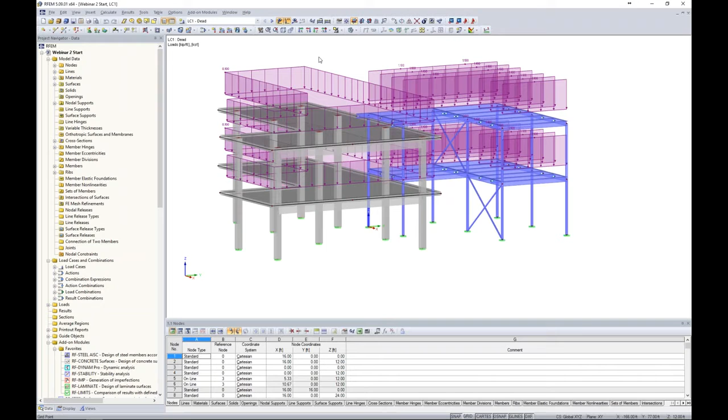Previously we loaded the structure, and we ran our load combinations and got a full analysis. Now that isn't always the case. Sometimes we go to run an analysis after we have loaded our structure. For example, we have loaded our structure with dead load here. Previously everything ran great, but as we know with any finite element software, that doesn't always happen. So when we go to run this first load case, as we know from RFEM Webinar 1, this is running according to a linear analysis, and we immediately get an instability.

Instabilities are nothing new despite what program you're using, but I want to show you these features that make our lives a little bit easier within RFEM. The first thing to know is the text about the specific instability. It says this model is unstable. The instability is found at FE node number 64, direction Z. So it immediately gives me a location and tells me that there's some type of issue in the global vertical direction.

The model is statically underdetermined. So when I close out of this error message, you'll see that my big red arrow shows me exactly where FE node number 64 occurs. Now, I'm not going to say that 100% of the time this big red arrow is going to point out our issue.

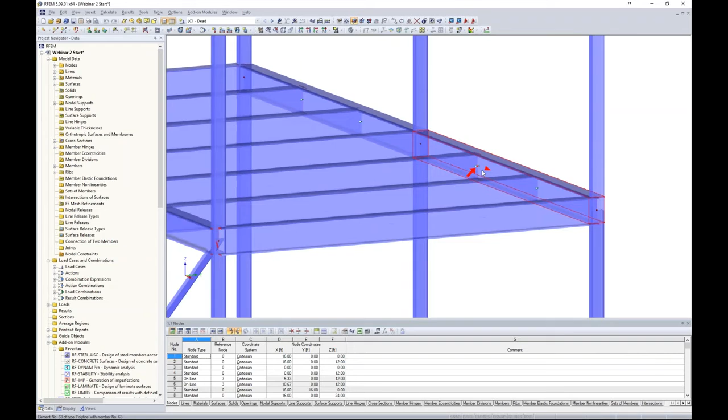But a lot of the time this really is where the issue is occurring. So when I scroll in here, I really don't see anything immediately. When I turn it to a wireframe model, I can zoom in here and see that I forgot to connect my node here of my beam to my transverse beam. Well, that's no problem at all, I can just easily drag and drop that to connect those two members.

So you can imagine that when we have a huge model with a lot of members and we get this error message for an instability, that red arrow is a huge benefit to really narrow down on where that issue is occurring, rather than it being a hunt for a needle in a haystack trying to determine if a node isn't connected someplace.

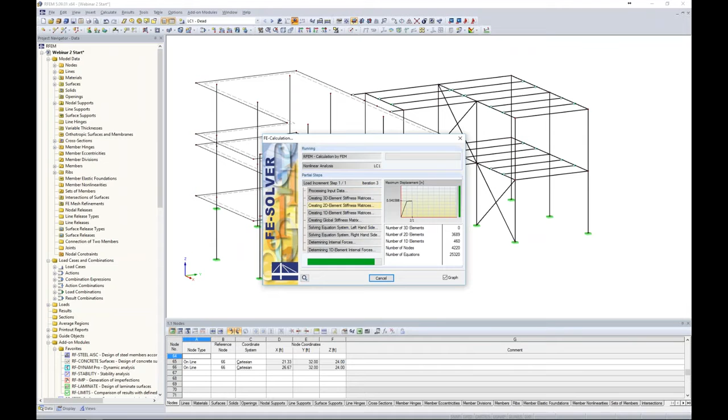So now we can go and run our load combination again, or this is our particular load case. We run it, everything appears to run okay this time. We immediately get our deflections here, which we can decrease the deformation factor.

So that's great, but now we need to run our first load combination, 1.4 dead load. This is just a load combination from ASCE 7. I take a look at my applied loads - it's applying that 1.4 factor to all of my dead loads, our surface loads and line loads here.

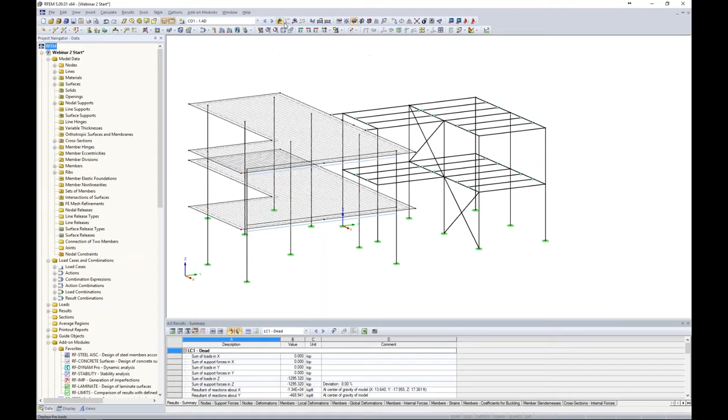And maybe turning this back into the rendered view, I begin my first load combination analysis. And lo and behold, we get another error message - another instability. But this time our text is a little bit different. It says our model is unstable and the instability is found at this location, direction X. So we have a little bit of a different direction that it's being affected now.

But this says a specified load is greater than the critical load. So this tells me that at this particular location I probably have some type of issue with buckling, because the specified load is greater than the critical load.

Well, I can close out of this error message and zoom into this big red arrow here. Maybe I turn this into wireframe - I see that everything is connecting fine. So I don't really understand where this error message could be coming from.

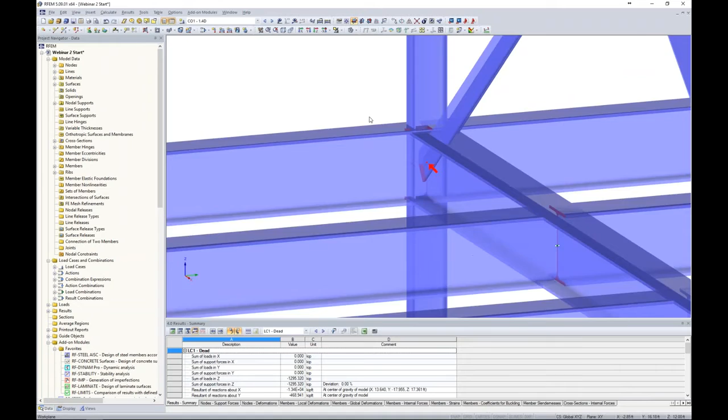Well, this is where we can utilize our add-on module RF-Stability. So from our long list of add-on modules over here on the left in our project navigator, we can launch RF-Stability. As you can see, this is just a simple dialog box that pops up within the program, and it allows us to do an eigenvalue analysis for a few different eigenvalues based on the buckling behavior of our structure. And what we can do is import different axial forces from either load cases or combinations.

Now, because I was able to solve for my first load case, dead load, just fine, it makes sense to import in those axial loads to see how the structure is behaving based on those applied axial forces. Now, we have quite a few other settings here that I won't get into in too much detail, but we do have an option down here to calculate an eigenvector for an unstable model. So this is if I couldn't get the model to solve at all, so that the causes of the instability can be checked graphically. This is a feature too, if we couldn't even get our dead load to solve.

Now for this, I will run the calculation, and it quickly runs the different 4 eigenvalues. I'll now see my results available in my tables here. So you'll see I'll have 2 different columns - the first is the critical load factor.

Now the critical load factor is just a factor that I can multiply that applied dead load by before I'm going to see the associated buckling behavior. We have 4 different eigenvalues, so the critical load factors are listed here in ascending order. So probably our most important one would be this first eigenvalue.

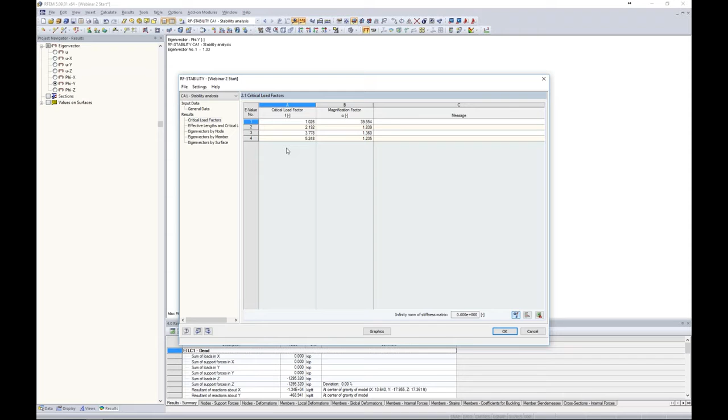So if I take a look at my graphics, we're still in this add-on module RF Stability. We can see with our drop-down box here, I have my 4 different eigenvectors. Looking at the first eigenvector, we can see the buckling behavior of this structure. Remember, I can only multiply my dead loads by 1.03 before I'm seeing this type of behavior. Taking a look at the other eigenvectors, same type of behavior. It all has to do with these slender columns here. So you can imagine when I multiply my dead load by 1.03, I see this buckling behavior, and when I'm trying to run 1.4 times my dead load, that's where our instability is coming from. These members simply can't handle the applied loads.

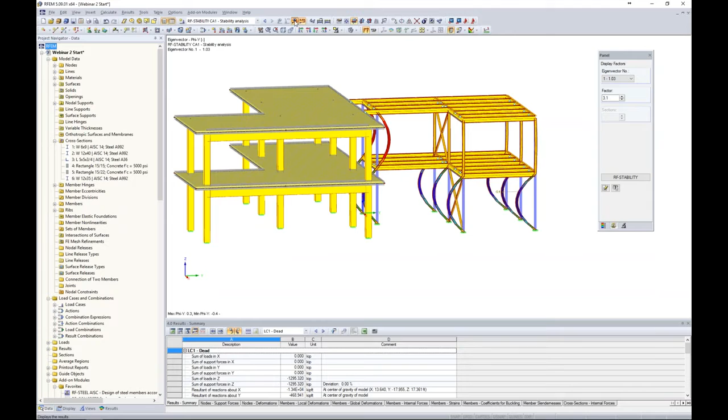Back under my data tab, at the very top is all of my input data. I can take a look at my cross sections, for example, maybe turn off my results here from RF Stability. I click on my first cross section defined. It's a W6x9, a very small number, so perhaps I want to increase that to something larger. I can just right click and edit all of these cross sections at once because they're assigned to a single cross section within the program. Open up my cross-section database, here are all of my AISC shapes. We would like to choose something more like a W10x49, much bigger than a 6x9. Still A992 is okay, but obviously we're going to have a bigger cross-section here. I click OK, and it's asking me to clear my results.

So now when we go to run our 1.4 dead load, run the analysis, everything should run fine because now we have a little bit more of a sturdier member there, and we don't see that same buckling behavior. You can see how RF Stability is extremely useful, not only if you just have an instability, but if you want to see the different buckling modes of your structure. I did a few other webinars where I utilized RF Stability to export as imperfections as well.

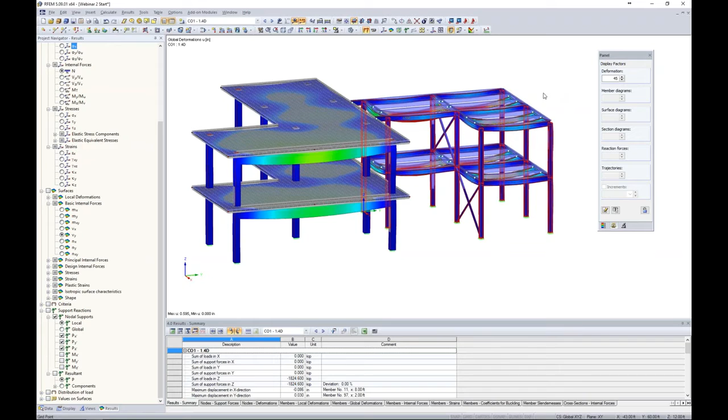Okay, so now that we have addressed instabilities, I'd like to move on to singularities. The first thing to do is to turn off our results, and let's take a look at our top surface here of our concrete structure.

If I drag my selection toolbar or selection box over that top surface, I can use my drop-down box here to create a visibility by selected objects. You can always right-click and show the hidden objects in the background if you'd like, or you can right-click and turn that off so we get a clean view of only the structure we've selected. Under Views, I can create a new visibility, and we'll call this Top Slab. I click OK, so now I have this user-defined view under Views that I can always refer to despite whatever view I'm currently in.

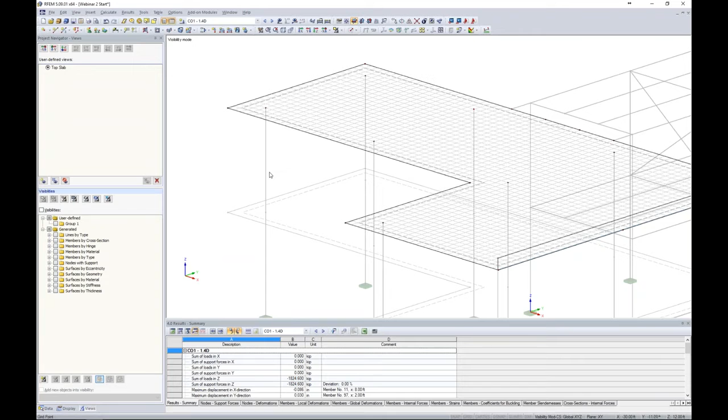This is the case when we go to show the hidden objects in the background and show a wireframe view: members are always 1D elements in a finite element software, while our surfaces are 2D elements. But the problem is that where we intersect this column to the 2D surface, the intersection occurs at this teeny tiny FE mesh element, the single node point. So we can imagine that all of our force transfer is occurring at this single point. Inevitably we're going to get very high stresses, very high forces. If we go to do design of this concrete slab, we're going to get high reinforcement simply because it's a product of the high internal forces at this location.

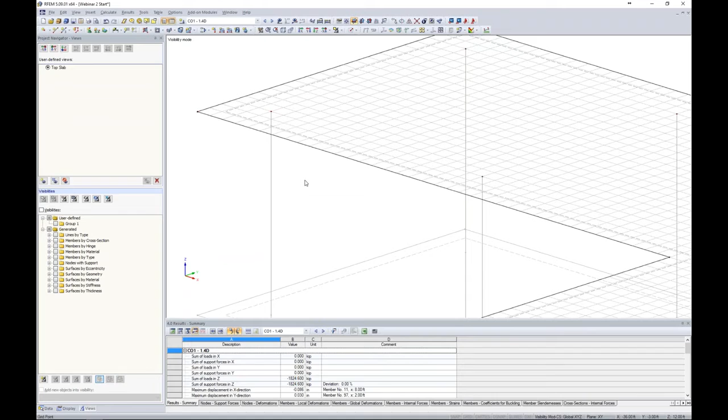Now in reality, when we render this, these columns are 15 inches by 15 inches, so we are going to get some load distribution. And like I said, this is not just for our program RFEM, this is common in any finite element software. So what tools do we have available in RFEM to help us address this so that we are not overly designing our structure?

Well, the first thing, and what I'm going to do, is jump to a different model here that I have saved, and I have went ahead and used our add-on module RF Concrete Surfaces to do my reinforcement design. Now I have an entire hour-long webinar dedicated to just surface design using this add-on module, so we won't get into it today. But again, if you are interested in how we can do reinforcement design for this, refer to that YouTube video.

So once we run our analysis in RF concrete surfaces to get design per the ACI, we have our different required reinforcement. The first is AS1 in the top direction. Judging by this red arrow, we can see the reinforcement direction, and you'll notice that where these columns are framing into the slab, we have high reinforcement given there. The same goes for AS2 in the other direction.

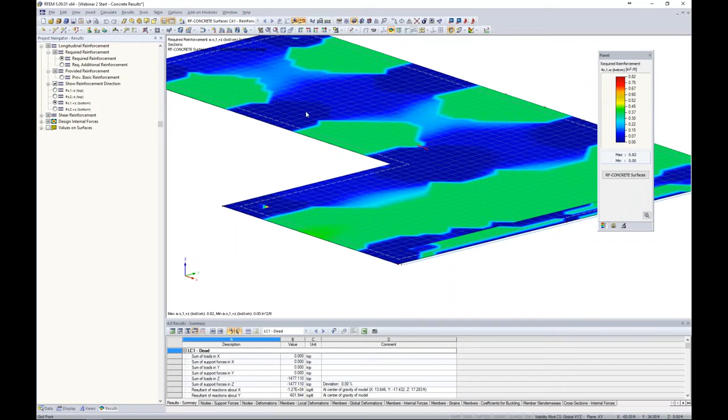Now, when we're looking at AS1 at the bottom, it's not the same, which makes sense. We have a lot of bending at the bottom of our slab between our columns, so that's where most of our bottom reinforcement is going to be. Same with AS2 at the bottom in the other direction.

Now, focusing on AS1 top and for our slab with this particular reinforcement design, this is nice in terms of our contours, but perhaps we'd like to see this in a more numerical value. Well, we can do so with sections, and what we will do with our first section is up here in our dropdown, we can create a new section numerically.

But before I do that, right next to it, we have the option to completely turn off our ISO lines. So these results will still be available, but I'm just simply turning off those ISO lines for the sake of making my section cut right down through the center of my slab. So a section is exactly what you would think of it. It's going to give me the internal forces or my results at that particular location. So we can create this section numerically.

Now, the first thing I need to do is to give it a section name, section 1. It will be a section cut through my surface, and I can apply this to my single surface number 2 here by clicking on that graphically. The next thing to define is my start and end points for the section.

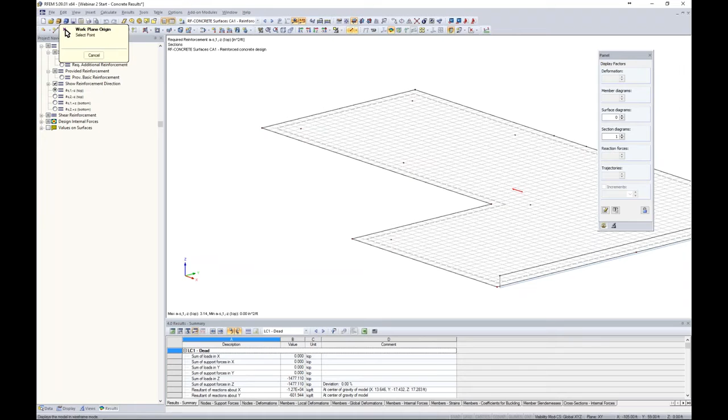So what I like to do is maybe turn on my drawing grid down here, and I can activate that down at the bottom, change my origin for my drawing grid, and I can choose my 2 points here by zooming in, and I want it right down that column line. So my second point will just be located at the second end of my slab, and because of those AutoCAD-like features, the program does a great job of just snapping to those points that I most likely would want to place my section.

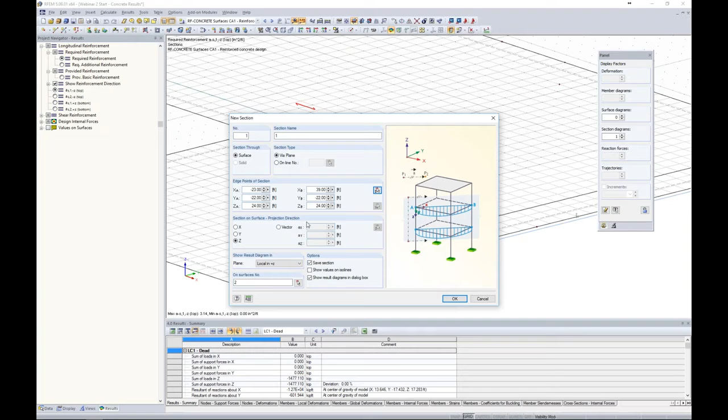Now, the section on surface, the projection direction, we can have it in the global X, Y, or Z orientation, or we can define our own vector if we want it at some type of angle. Once I click OK, then it immediately brings me into the results diagram for my section, and you'll see our exact same results that we were viewing in RFEM, and in particular, we take a look at our reinforcement design per RF concrete surfaces.

Here are those spikes in reinforcement where our columns are framing into our surface. I think we can easily say that this is being over-designed for those internal forces. Now, I can always exit out of here and view these surfaces, as you can see graphically on my surface as well.

So going back to the results diagram by right-clicking, I want to show you guys a useful feature called smoothing ranges. So up at the top is the option to edit our smoothing ranges. Now, my first column occurs 3 feet from the edge of the slab. My second column occurs at 20 feet from the edge of the slab, and my third at 41 feet.

So what I'd like to do is smooth out the range, maybe 1 foot on either side of the column for a 2-foot range there. This is to account for the load distribution that's occurring when in reality the program's not accounting for that. So what we can do is define our different ranges.

For example, for our first column, the beginning will be 2 feet and the end will be 4 feet. The program automatically calculates the length as a total of 2 feet for that first smoothing range. The second will be from 19 feet to 21 feet. And lastly, for our third column, it will be from 40 to 42 feet.

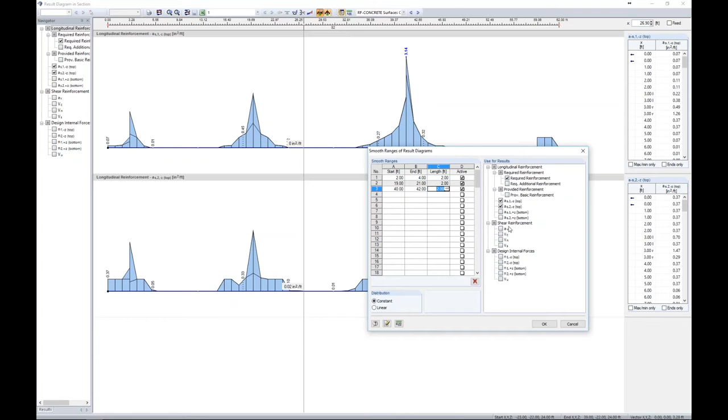The program automatically assumes that we'd like to apply these smoothing ranges to what we're currently looking at, but we can always activate and deactivate different results available here. So now when I click OK, you can see the smoothing range applied.

For example, column number 3, we went from 3.14 inches squared per foot to 1.65 inches squared per foot. So this is extremely useful in the sense that we can print this to our printout report. We can even use this drop-down box here and pull up one of our other load combinations.

I'm going to clear out all of these result diagrams and just activate my MX and MY. Again, we're seeing those spikes in internal forces here. I can go back to my smoothing ranges and simply activate the checkbox for MX and MY for all 3 of these ranges. So now when I click OK, you're going to see the smoothing range applied here as well.

Now, one thing to note, if we jump back to RF concrete surfaces, for example, the smoothing ranges are shown here, but if I were to exit out, they are not shown graphically here within the model.

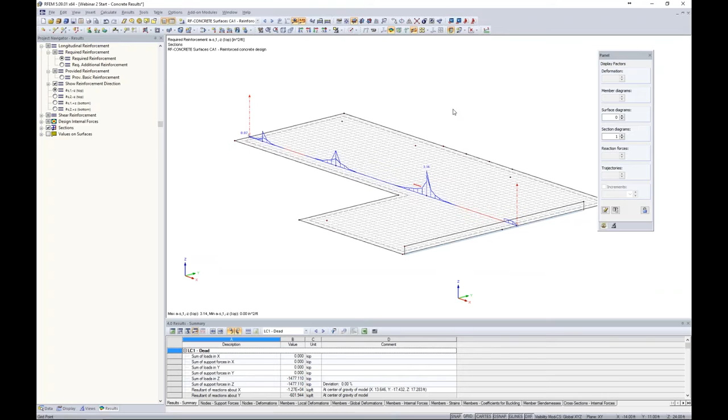So the question is, that's great, but how can we apply this so that the program actually designs for those average forces rather than us just putting a fictitious number after our results are shown in the smoothing ranges? One thing I forgot to mention: if we take this section cut and highlight it, we hold down our control key, maybe we want to copy it down this other column line just to give us some perspective on some high design forces as well at this location.

So smoothing ranges are great, but if we go back to our data tab, we will see these sections available here. We have section 1 that we just created, and then here's our second copied section. There's another feature called average regions.

So if I right click, I can create a new average region. Now for this, we want to apply it to a particular surface, so I graphically select surface number 2 here. You'll notice that I have 3 different forms that I can select for my average region: a rectangle, a circle, or an ellipse.

For our particular case, our columns are rectangular in shape, so it's probably most beneficial to use a rectangular averaging region. But maybe you have a circular column framing into this slab, so that can be utilized as well.

The next thing we want to do is to define where we want to apply the center of the averaging region. We'll apply it to our first column here. The dimensions, if we want to average it out over a 2-foot section again, for both our A and B dimensions shown in this picture, we can.

Now, you have a lot of control on what internal forces you exactly want to average. The program assumes that for the local axes of our average region, U and V, we want to correlate those with the X and Y local axes of our surface.

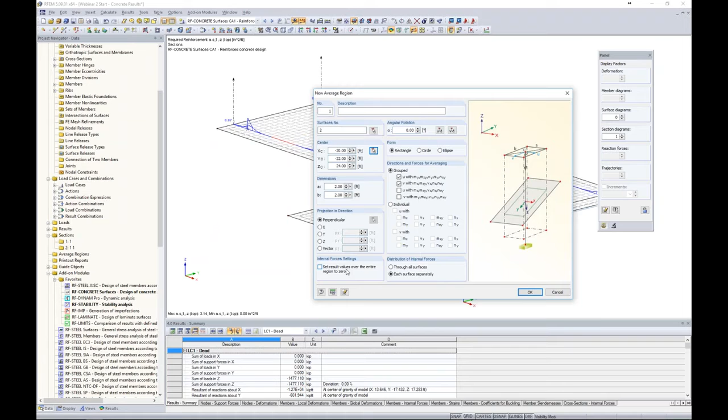The internal force settings even give you the ability to set all the result values over the entire region to 0. This might be beneficial if we're checking punching shear for a column and we're really interested in the shear at the critical shear section, and we don't want to design for anything within that critical shear section.

So if we click OK, then we will get our first average region. Now, to make this very clear what we're doing, I'm going to jump to one of these particular load combinations, and under my results, I'm going to activate my sections. So we're still viewing our sections here, but for my MX forces.

So this isn't my concrete design now, this is my internal forces MX. Now with this average region, all I have to do is select it, hold down my control key, and then I can take it, drag it, and drop it. It's asking me to clear my results, that's fine, and I drag and drop it to some other regions here.

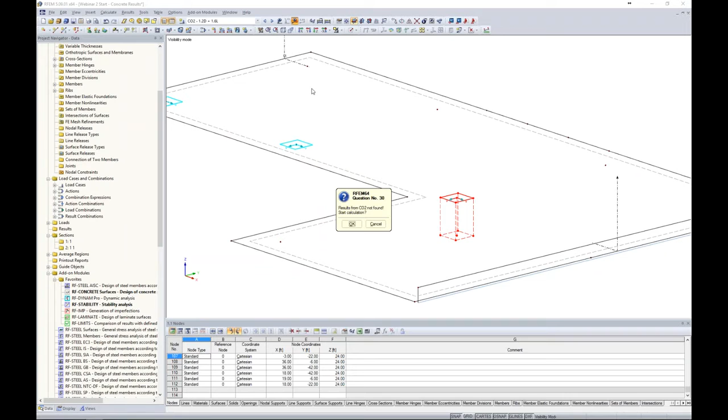Now I can rerun that same load combination rather quickly here, and we will see that average region now apply. Previously this was something like 83 kips per foot, so you can understand that this is now going to give us less internal forces.

Now if we jump back to RF concrete surfaces, it looks like we lost our results here, so I'm just going to quickly rerun that. All this is doing is applying the ultimate limit state designs for all of my load combinations to do my reinforcement design. But what I want to show you with these average regions is that my AS1 top is still showing 3.16 inches squared per foot, so this average region did absolutely nothing to help us with that.

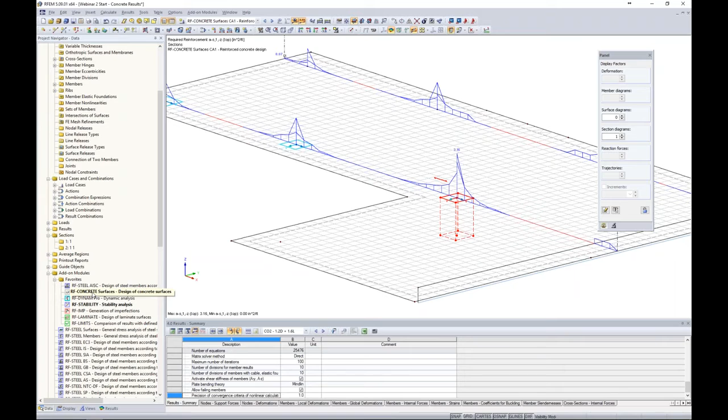So why is that? Well, back under the Data tab, under the Concrete Surfaces add-on module—again, if you want a more detailed look into this particular add-on module, refer to our previously recorded webinar—but to let you know, when you are using average regions for concrete design, under the Details tab, it is default to have this option checked off.

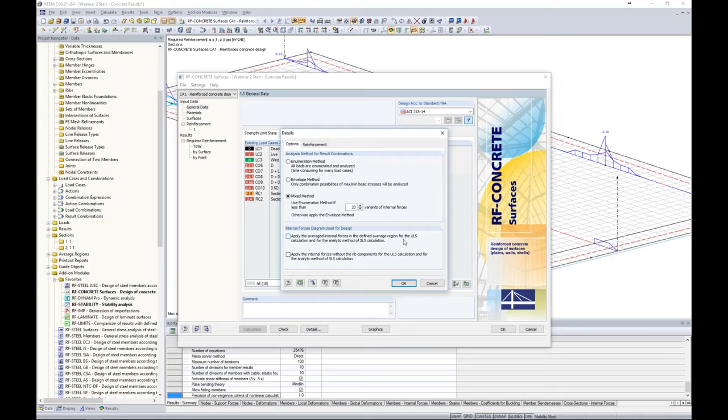But what we'd like to do is apply the average internal forces for our ultimate and serviceability limit state designs, so now we want to check this checkbox. I click OK, I click OK. We've lost our results again, but we can run a quick analysis, which solves rather quickly, because now it's taking those average internal forces to give us our reinforcement design. So now we've gone from 3.14 to 1.83. This is how we can apply those average regions to address singularities within the program, especially for something like concrete design.

Okay, so that is what I wanted to look at in terms of singularities. Now, switching topics, I'm going to cancel my visibility mode here and render my model.

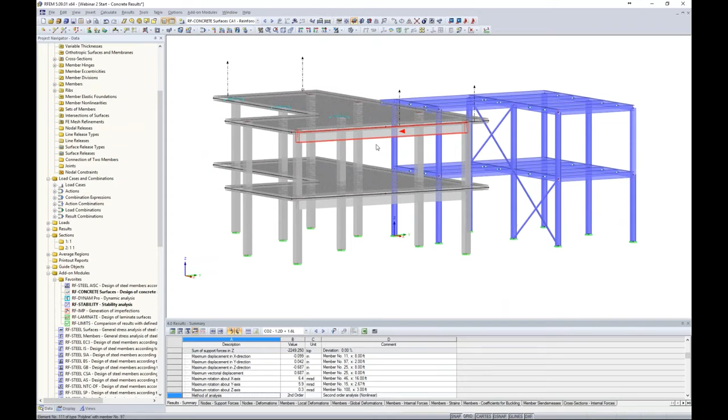In RFEM Webinar 1, if you can remember, we created this beam member here, and it's actually a rib because we wanted to span from this column to this column, but we didn't have an intermediate column, so we thought it'd be best to apply a rib member there. If I double click on this rib member, you can see the member type is set to that, and previously we had defined effective widths for this rib member to take that into account for analysis, but also to design for our reinforcement per the ACI.

Now let's say we have a situation where we actually have a precast element, and the precast slab is sitting on this precast beam. It's not a monolithic pour like what we'd see with a rib-type member, but in reality I want to fully release the moment. Maybe I still have resistance for my lateral movement and of course my vertical movement, so X, Y, and Z is fixed, but no moment will be transferred between the two. So what I'd like to do is not have this set as a rib, but set it to a beam member. Now when I click OK, it's asking me to clear my results.

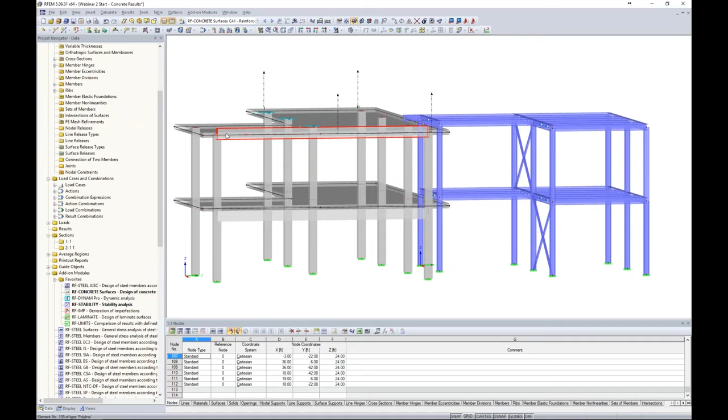I take a look—my typical member is modeled directly at the center line, the same center line as the slab. But in reality, I'd like to drop this beam down below the surface. So how can I apply an eccentricity? If I double click this member, we have a tab here called Options, and that's where you'll see member eccentricity. Now we need to define a new member eccentricity, and you'll see here that we have not only the local axis system X, Y, and Z for a member, we can also set it according to the global X, Y, and Z.

The local might come in handy because if we are modeling a member at an angle, then obviously we want to apply the eccentricity according to the local axes rather than the global. We can also apply this movement of the beam in X, Y, and Z, so not necessarily just vertical eccentricities, but left and right too. Typically with this situation, I would need to understand what's half the depth of my slab, what's half the depth of my beam, add those together, and manually apply my eccentricity. But we have automatic features in the program that can do all of that for us.

You can see here that I have 6 different options of where I can select my beam to be for the eccentricity to be applied to. This little red dot highlights exactly which option I've selected here. So I'd like the top of my beam, and I want to offset it according to a surface, so I can graphically select my surface number 2 here, and offset it from the bottom of that slab. Now when I click OK through all these dialog boxes, we can see that beam was dropped down below the bottom of the slab. This is the same concept as the rib member, but now we're not taking into account that effective width.

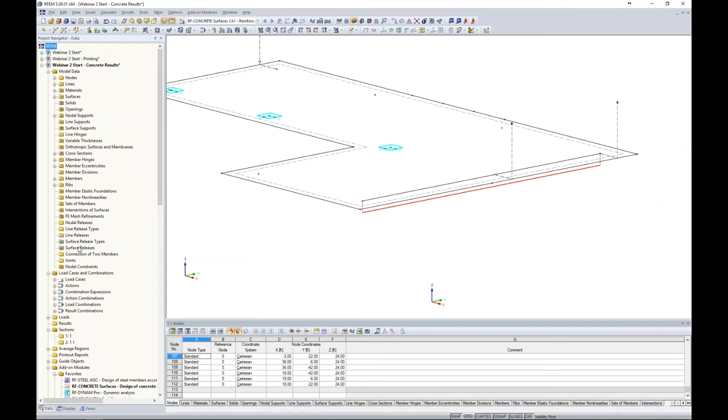So what I can do is right-click to apply a new line release. The first thing the program asks is to define the line, and I'll apply the line I used to create the member. If I try to click the member itself, it doesn't allow that, because in reality that's not where the member was modeled—it was applied to this line integrated within the surface. Then we create a line release type.

With a line release, we have the ability to apply releases in the translation directions X, Y, and Z. You can see we also have partial fixities here, so maybe we don't have a full release or full connection, but we can apply a partial fixity spring constant, and we can get into nonlinearities. Nonlinearities might be very important for something like friction—if we choose one of the friction options, we have different settings based on friction coefficients that allow us to emulate that same connection type.

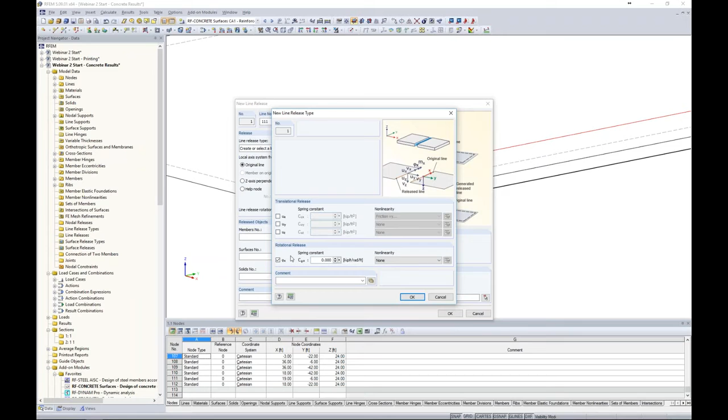Keep in mind these are the local axes of the original line. Surfaces have their own local axes, our beam has its own local axes, and so do our lines. So we're not releasing any translation or rotation directions of the beams or surface, but rather the line itself. We are going to completely release this rotational release, phi x here, and we can click OK.

We do need to define which are the released objects. We'll apply this to our surface number 2 again, press OK, and we'll see the setting within the program showing we have some type of line release here, judging by this blue symbol.

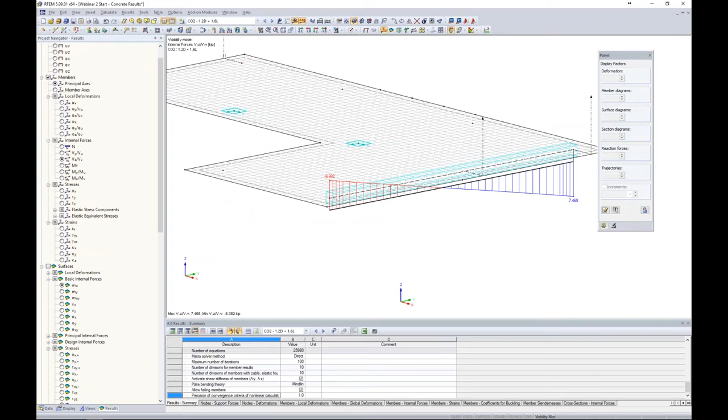Now if I were to run one of my applied load combinations, such as 1.2 dead, 1.6 live, we can run this load combination—just viewing our initial view here. I'm going to turn off my surfaces and sections, and take a look at our members and internal forces for torsion. You can see here we still have a small amount of torsion along the member length of 1.933 kips per foot. But what would this look like had we not released that particular moment along the member length?

So this is how we can effectively apply line releases in the program if, for example, we did not want to connect our surface to our beam element.

Okay, so changing topics once again, I want to move on to result beams. For this, I am going to cancel out my visibility mode here.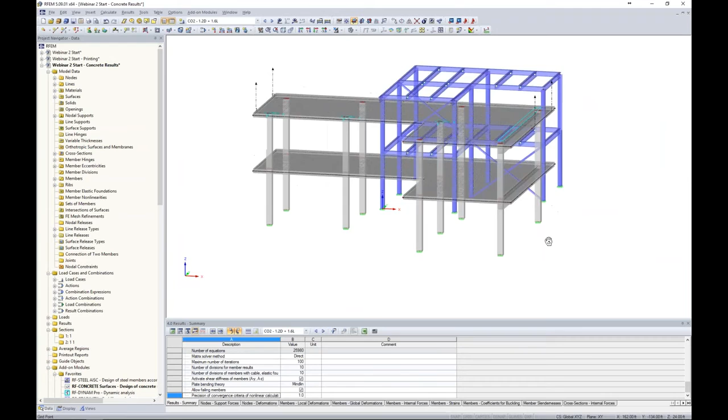Let's render our model and move on to result beams. Let's say I'm interested in only my concrete structure here, not my steel structure, and in particular I want to know what the story shear forces are, without incorporating the steel beams, just the concrete surfaces and members. So how do I easily pull that information from the program? This is where something like a result beam will come in handy.

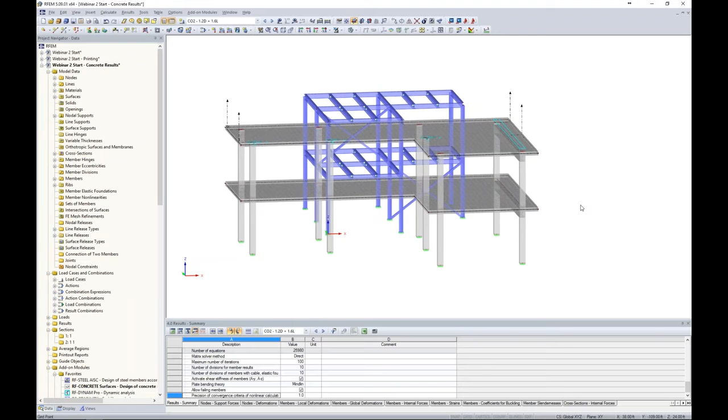So what I'm going to do is first create a new user-defined view here, using my drop-down box, visibility by selected objects. Keep in mind that behind the scenes, when I show my hidden objects in the background, this steel section is still here. So under my views, I can create this new user-defined view. We'll call this one concrete structure only. I click OK.

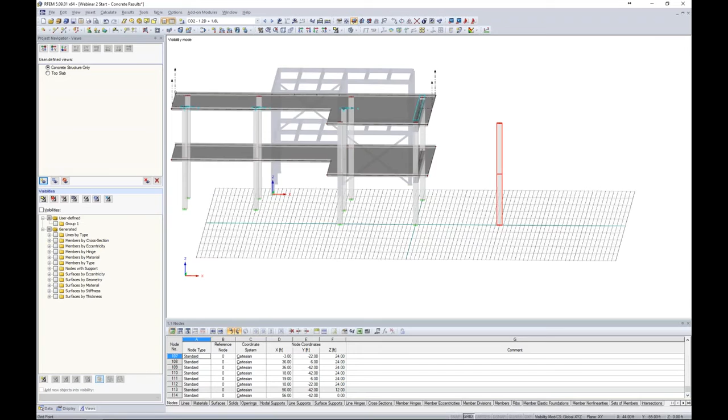I'm going to turn back on my grid and redefine the origin at the base of my structure. I'm going to hold down my control key to select these two members, and once again holding down my control key, copy these, drag and drop them to a location parallel to the concrete structure. So what I'd like to do from here is select these two members, right-click to edit them.

And under the member type is where we can choose result beam. Now, a result beam is simply going to take the information from other objects in the model and apply it so that we can view the analysis results as a member internal force. Result beams don't add to the stiffness of our structure, we're not applying them to an analysis. It's just simply a different way to view our results.

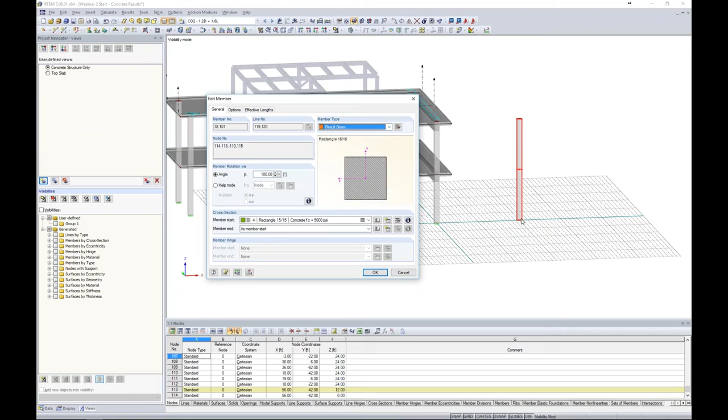So as far as cross section, it doesn't matter if it's concrete, steel, aluminum, or your own user-defined section, you can choose anything here. You'll also notice I don't even need to put a support at the base of this column section. What I need to do here is define some additional information.

Now, as far as result beams, we have four different options. The first is within a cuboid quadratic. This is going to use a quadratic integration area where the centroid of all of the elements I'm trying to incorporate within this result beam needs to be located within the member's axis. By member's axis, I mean the axes of our actual result beam shown here. I'm not going to use this option today, but we will be using this second option as our second example today.

This is within a cuboid general. What this will do is apply a rectangular integration area where the centroid can vary according to the local axes of our member. The third option we have is within a cylinder, which uses a circular integration area where the centroid must be located at the member's axis. Again, this is clarified here with this nice picture that we have.

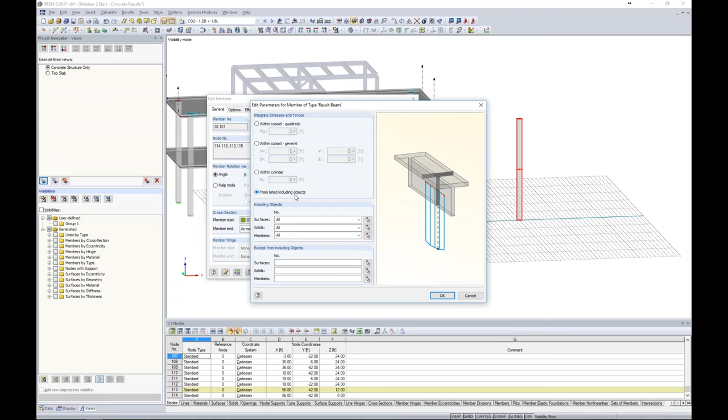The last option here is to choose from listed including objects. So here is where I'm going to start off with my first example of a result beam. What I want to do is select my surfaces that I'd like to apply to this result beam, so I can just highlight everything. Remember, my steel is in the background, but because it's not selected, I don't have to worry about selecting anything from there. As far as solids, we don't have any, so we can leave this either as all or none. And for members, we want to graphically select all of our concrete members here.

I click OK. We can even exclude any objects from our selection if we'd like to here. I click OK, I click OK.

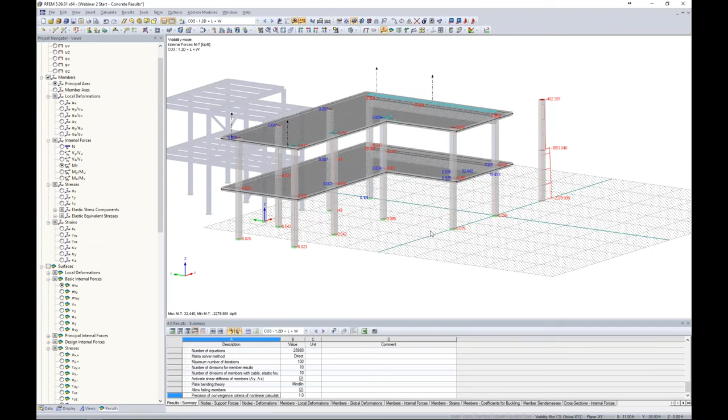Now I'm going to run one of our load combinations where I have a lateral load applied. You'll remember from webinar 1, we applied a wind load in the Y direction here with some gravity loads. So if I run this first load combination, you will notice that after the result is complete, I have my member over here with some results as well. So what's exactly happening? Well, I want to view my results on my members like I would any other member within the model.

What this is doing is incorporating all of my objects here and applying it to my result beam. Just to summarize what's exactly going on.

As far as viewing my shear forces in the Y direction, this is the local Y direction, so I can right click and turn on my local axes to understand exactly which direction I'm looking at. The local Y gives us my story shear information. For example, the top story is 10.46 kips for this particular load combination. My first story shear is 39 minus the 10, and finally I have my base shear given here at 48 kips. If we take a look at our shear in the other direction, we hardly have any forces at all, because we haven't applied any lateral loads to this.

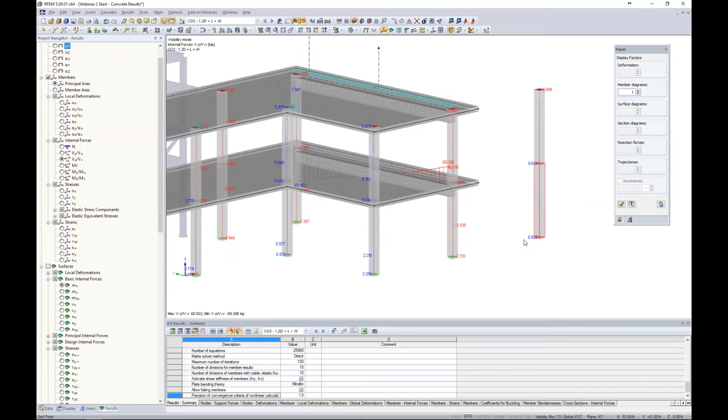Now lastly, we can even take a look at our axial loads. Why would our axial loads be important? Well, if we're interested in the sum of our forces, I can see that for my concrete structure only, my sum of forces in the Z direction is 1,455 kips. This is different from my table down here shown in the results summary, which also gives you the sum of the loads in the Z direction, but that's for the entire structure, including the steel structure over here. So again, the result beam would be beneficial for only part of your structure.

Now, the moments are not applicable in this case, and that's because we have moved the members of this result beam away from the centroid of the objects we're interested in. Just keep that in mind when we're looking at something like moments—we can't get an accurate representation here. I'll show you in just a minute how we can do so.

But first, I want to quickly jump back to the PowerPoint to explain what's going on. As you saw with a result beam, we're integrating the results from a list of objects. These result beams only include the elements within a rectangular axis of the member start and end.

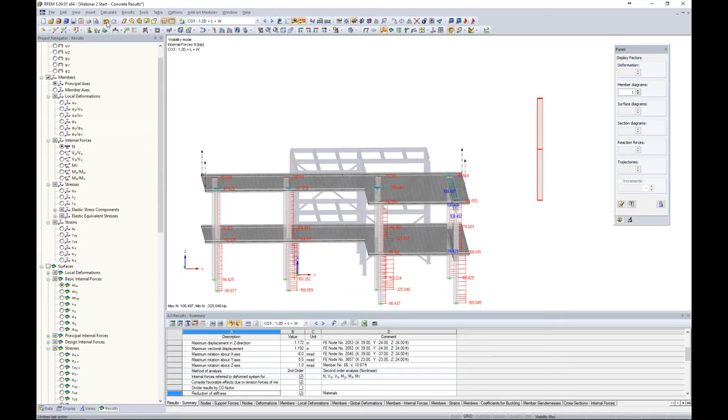Now, as we just saw with the axial and shear forces, the parallel distance from the centroid does not matter. Going back to RFEM, I can move this result beam in the left and right direction. But if I simply move it in the vertical direction, those results are now gone—that's because I did not move it in a parallel direction to the objects I'm interested in. So that's the one way you need to make sure you see your results accurately for your structures: make sure it is parallel.

Going back to the PowerPoint, now our moments—torsion, strong and weak axis bending—the beam must be placed at the centroid.

Let's move on to a quick second example with our result beams of how we can utilize this to view our moments. For example, if I'm interested in my top slab here, which we can go back to our user-defined views, I really want to design a 4-foot wide section on my slab, and I want to pull those internal forces from that 4-foot wide section.

Well, a section cut isn't going to work here because a section cut only gives me my internal forces at that exact location—exactly what it is, it's a cut. So in order to utilize a 4-foot section and pull those internal forces, we want to use a result beam. So what we can do is create a new beam member here, and instead of the member type beam, we will choose result beam.

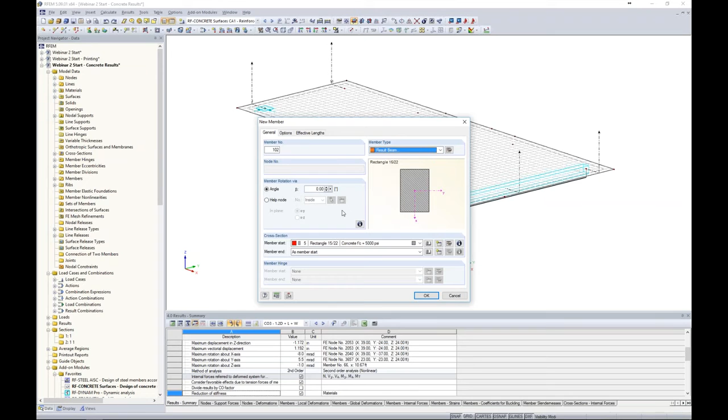And again, the cross section does not matter. We could choose anything we like because we're not contributing to the stiffness of the structure in any way.

We want to move on to the details of this result beam, and this time I want to choose within a cuboid. If I'm interested in a 4-foot section, that means 2 feet on either side of my result beam, laid out clearly in this picture. As for the vertical direction, this isn't as important because I don't have any members modeled above or below—I'm only interested in this slab, so 1 foot is more than enough. But if I had any elements within this 2-foot vertical section, they would also be included in my results, so keep that in mind.

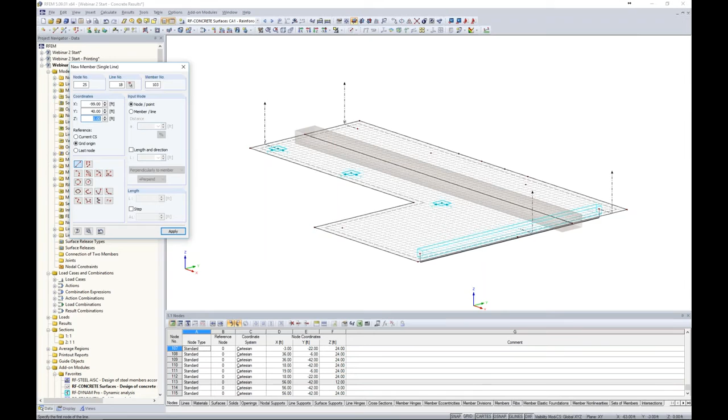This list is no longer relevant because I'm using only this section up here. So when I click OK, I can begin modeling my new member. I'll snap to the midpoint of this line to make my result beam section right down the middle of this slab. You can see the program automatically snaps to the perpendicular section, just like in AutoCAD. And here is my result beam, showing that 4-foot wide section.

We can even render this if we'd like a clearer view of what's going on. Now let's take a look at our results—I'll run one of my load cases here, it doesn't matter which, 1.2 dead, 1.6 live. I'm going to run the analysis.

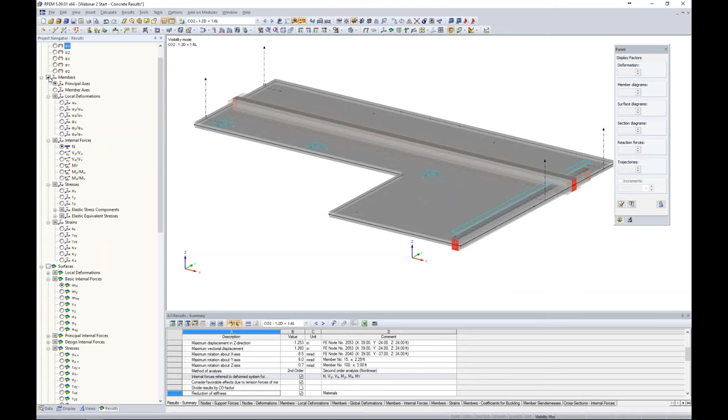As far as our result beams, we can view them like any other member, as mentioned before. The first thing we want to do is look at our member internal forces, and perhaps we're interested in the moment. Let me turn this to wireframe view. Now our moments don't have a nice smooth diagram for this beam member. So what's going on with this results diagram? It's pretty choppy.

When you're using a result beam like this, under Calculate, Calculation Parameters, you want to change the number of divisions of members for result diagrams. The default is set to 10. Let's change this to something like 100. I click OK, my results are cleared, and I quickly run the analysis again—we'll see that our results look much better.

So that can impact the way you're viewing your results. You want to make sure to increase those numbers of sections if you see any type of discontinuities like we saw with the beam before.

Now we can see that our moment diagram is displayed quite nicely for our strong axis. Remember, these are the internal forces for our 4-foot wide section, and we can take these internal forces to do our own design. We can look at the weak axis bending here, and even look at axial and shear forces—these are all relevant within this particular section.

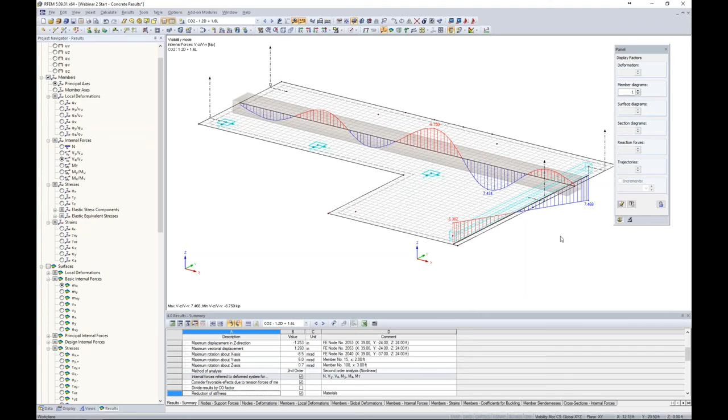But this is what I'm saying when you want to look at the internal forces or moments: the centroid of the elements we're interested in must be at the same location as our result beam's axes. Just something to keep in mind.

Okay, now that we've seen more about result beams and focused heavily on our concrete structure, let's cancel this visibility mode to take a look at our entire structure. And I'm going to render it. Maybe I'm interested in the steel structure, and in particular I'll zoom in here to take a look at this connection.

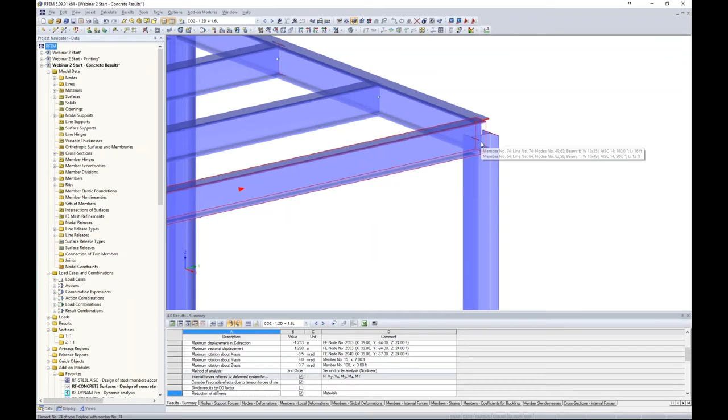Now this connection is pretty straightforward—we have members framing in at 90 degrees. But if we didn't, let's say we had tapered members, or members framing in at a weird angle, that might flag us to think, okay, perhaps we'd like to do a finite element stress analysis for this connection.

But if I turn this into a wireframe view, I cannot do a stress analysis of this connection because all of my members are 1D elements. So we can get stresses along the member length and the member as a whole, but not for this connection. So what would we like to do about it? Well, the first thing to note is that, judging by this big red arrow shown here, the member end is framing into this node.

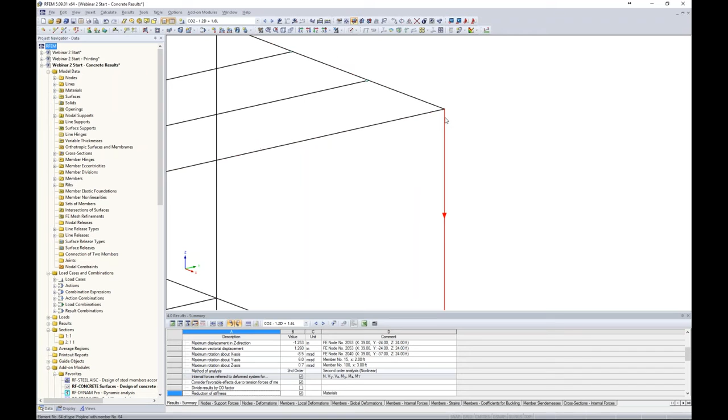The same with this member, but this third member, the member start is framing at that node. So what I can do is just right-click to reverse the member orientation. Now all three of my members will be framing in at this single node.

I'm going to select them all, right-click, and choose to divide the member by a certain distance. Because I switched around the member orientation, the member ends are all located at this particular node, so 3 feet from the member end is where I'm going to divide it. Now I've done nothing more but just create smaller members out of my initial member length.

If I render this, sure, we get this rendered view of our W section, but turning it back into wireframe view, I'm going to highlight all three of these members. I'll right-click, and under member, choose the option to generate surfaces from members.

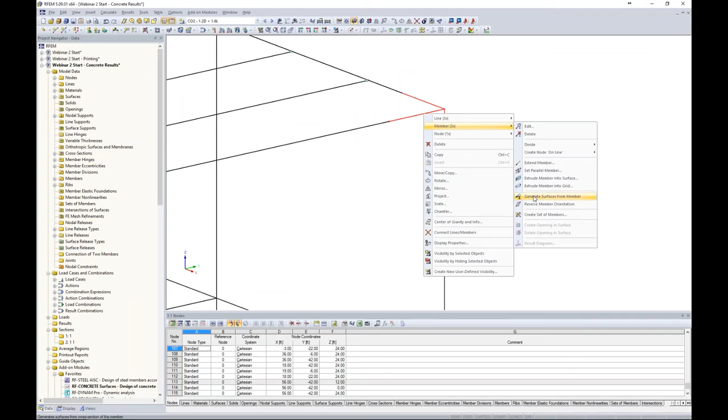So now what we've done is we've taken these 1D member elements and turned them into 2D surface elements. This will allow us to do a stress analysis on this particular connection.

Now, the first thing I want to do is under my display, I'm going to turn off my FE mesh refinements. I'll get into this later.

First I wanted to mention that this W shape was previously a W12 by 35. This new W shape generated by the surfaces has all those exact properties. For example, the web surface here has a thickness of 0.31, taken directly from the W shape. All of my dimensions, materials, and thicknesses were all taken from that member that was modeled previously, so I don't have to make any changes in regards to that.

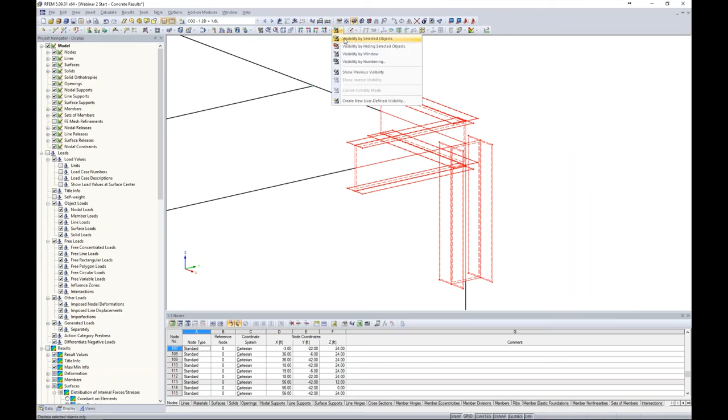What I do need to do is clean up the geometry a little bit before running my analysis. So I can highlight all of my members and create a new visibility by selected objects. Maybe I want to show my hidden objects in the background.

Now, this is a nice little trick for even our users of RFEM who've been using the program for a while. If you didn't know, you can select one of these elements, and if you hold down the Alt key on the keyboard, that will allow you to rotate about those selected elements. Just a nice little feature to utilize there.

Now, to clean up the geometry, I'm going to start by deleting these center lines. They're no longer needed. And you'll see that the column is a little bit low here, so what I'd like to do is extend this up a little bit above my beams.

How I can do this is to zoom in here, and hold down my control key to select the 6 nodes that comprise the top of my column, and use my move tool. I'm only going to move this 0.58 feet in the Z direction, so 7 inches. I click OK, and now you can see the column was simply moved above those beams.

Now the next thing is to move this beam here on our left to the face of the column. That's pretty easy. If we rotate our model and zoom in, I can again select these 3 nodes that entail the top of this beam and just drag and drop them to the snap point of the face of that column. Again, those AutoCAD-like features will allow us to snap to the most important parts of the model.

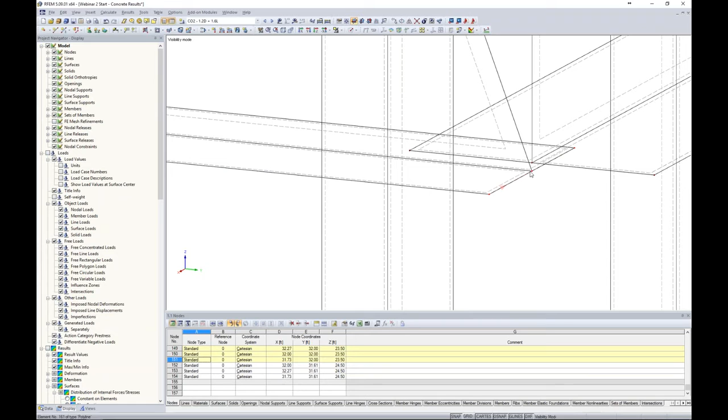Again, I do the same thing for the bottom. I just simply snap to that point, and now I can see that that beam is framing in quite nicely to that column. If I take a look at my rendered view, we can see that here.

Now notice the rendered view of our 1D elements transitions quite nicely to those 2D surface elements. But with that said, if I look at my wireframe view, these 1D member elements are framing into this 2D surface element again at a single FE mesh point.

This is a singularity. By no means do we want to use an average region here, because in reality what's happening is this whole load from this 1D member element should be distributed to the entire face of this beam. So how do we distribute that load? Well, that's where we can apply just our little rigid plate here at the end of our member.

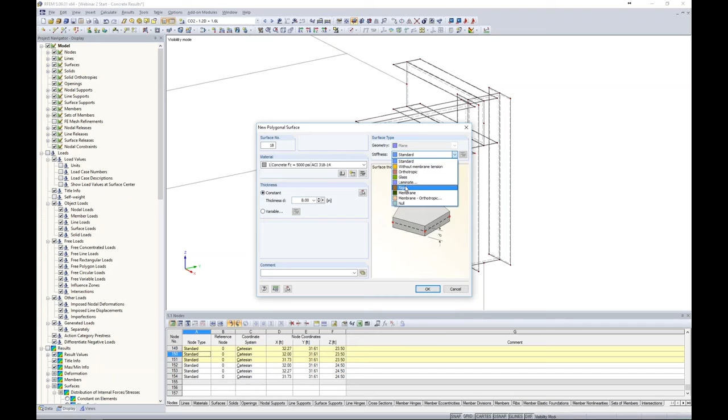Now, under our surfaces in the drop-down box at the top, we can choose something such as a polygon. As far as stiffness goes, I want to set this to rigid, so pretty high stiffness, not infinite, but very high within the program. I click OK, so then I can draw in this little rigid plate at the end of my member, and now that load will be distributed as such.

Now the same goes for my other beam locations. If I don't take care to draw in this little rigid plate, then I'm going to get singularity issues at all these other locations. So I'm just snapping to the 4 points of my column. And if I render this, I can see that these plates are shown with the pink color, which shows me it's a different material.

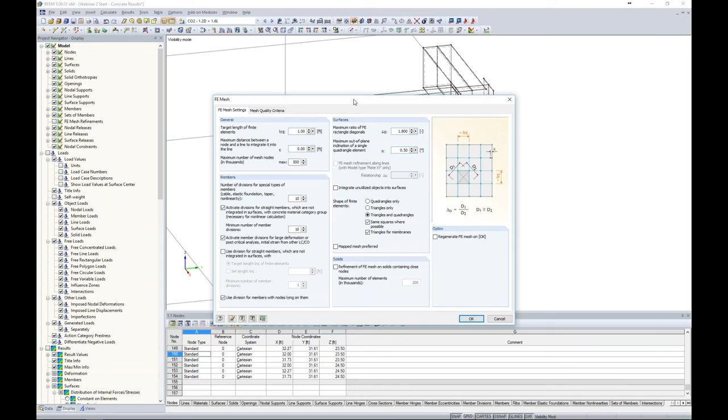Now, a couple other things to take care of before we're ready to run our analysis. Going back to wireframe view, and taking a look under Calculate, FE mesh settings, we see that the global FE mesh settings are set at 1 foot. Sure, 1 foot is great for our huge slab element of our concrete structure, but when we're looking at something as small as this connection, 1 foot is not ideal. So rather than changing this global setting, when I made that transition to these 2D surface elements, the program actually put in these FE mesh refinements for me.

That's denoted by this little symbol here. If I double click on it, I can see that the FE mesh was defined for each individual surface with a target FE length of 1 inch. This is more beneficial, because if I were to apply 1 inch to my global settings, applying a 1 inch FE mesh to all my slab surfaces would make my solve time much, much higher. The more FE mesh elements you have, the longer it's going to take to solve. So it's in your best interest to utilize these FE mesh refinements for situations like this that require a smaller mesh, but not anywhere else in the model.

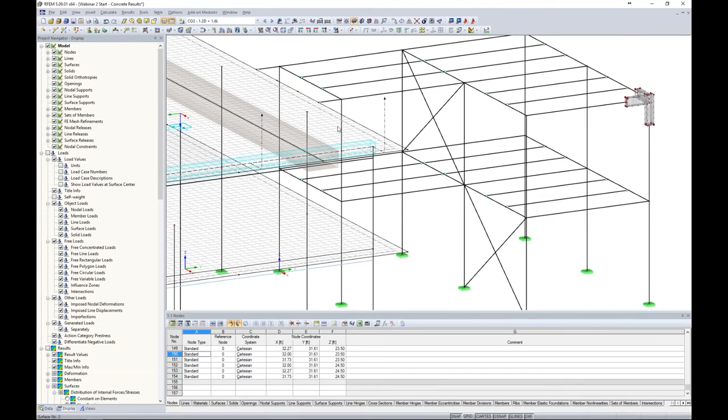So now when I go to Calculate, Generate FE Mesh, and let me cancel out of my visibility mode here, we can see the FE Mesh is automatically generated. Everything ties together quite nicely, and I don't have to manually submesh anything here. But when I look at my concrete surface, I can see that the FE Mesh is still 1 foot, so that looks great.

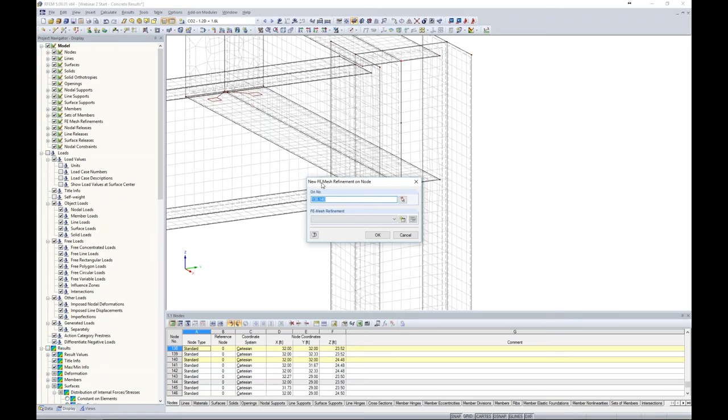Now, keep in mind, we can always apply our own FE mesh refinements. For example, maybe I have some critical points where my beam is framing into my web, and I can hold down my control key to select 2 nodes. I can right-click to add an FE mesh refinement, create a new definition type, and we can see the node is automatically selected because the program knows this is what we selected back in RFEM. We can give it a radius of 0.5 feet or 6 inches.

Maybe our target length for the inner portion of the circle is 0.02, and the outer will transition back to that 1 inch, or 0.08. I click OK, and now the program puts these symbols at those locations for my FE mesh refinement. I can go to Calculate, Generate FE mesh, and now we can see that the program has created this smaller mesh at this particular location, and it transitions nicely back into our surface mesh. Under the Display tab, we can always turn off these FE mesh refinement symbols. The refinement is still there, we just don't necessarily need to see those big symbols.

So in regards to our connection type here, originally I modeled this structure so it has a fully rigid connection of this beam framing into this column's web. But maybe I go back and decide that I'm actually going to have some type of weld here, and this weld is not going to have a full moment transfer. So I want to relieve some of those moments within the beam framing into the column web. How do I apply that to this connection? Well, that's where we can utilize line releases again.

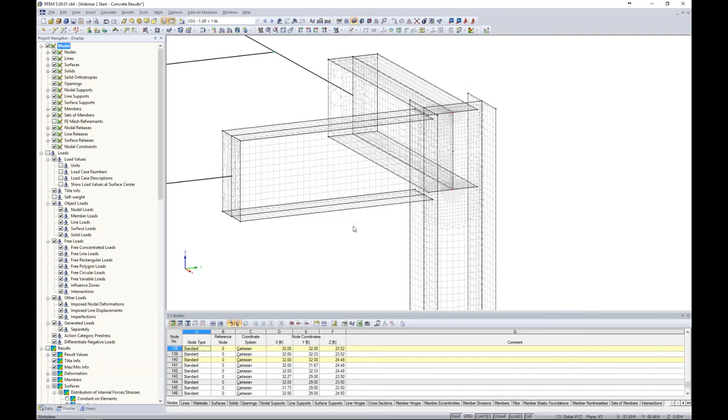So like I said, we're going to come back and apply line releases on a much smaller level here. Back under the Data tab, under Line Releases, we want to choose the option to assign a new line release graphically. Here, I don't want to override my previous line release type, because this is my beam to slab connection that we talked about earlier.

So what I'm going to do is simply create a new line release type, number 2. I want to release this moment, but we have some type of partial fixity here with the weld type we're using, so it might be something more like 40 kips per foot for partial fixity. I can click OK.

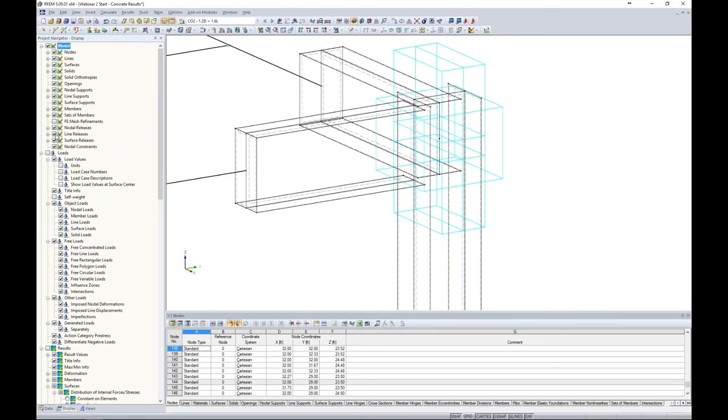The surfaces I'd like to release these lines from, I select my web element, and click OK. Now when I exit this dialog box, I can graphically select these lines where this beam is framing into this web. You can see my symbols showing the line release here, and under display we can turn those off if we don't want to see them.

We're almost ready to run our analysis, but let's take one final look at our applied loads. We'll jump to our dead load and see our applied loads. These are member loads applied in kips per foot along our various steel members, but we no longer have members, so we lost those applied loads.

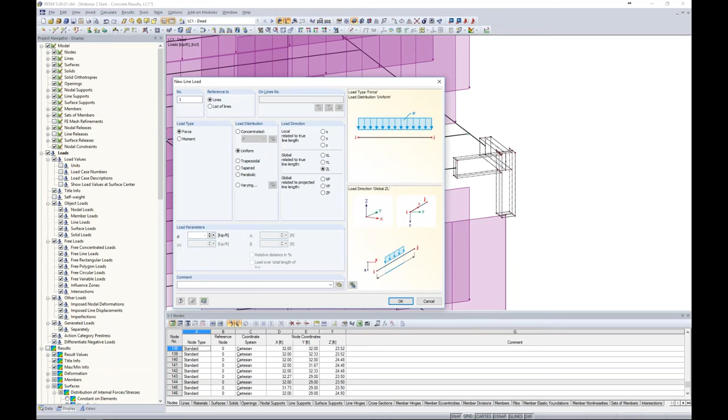In a similar sense, we can apply the same load magnitude, but this time as a new line load. Line loads are applicable for something like a surface, where we don't have a member available. We apply it in the global Z direction with a magnitude of -1.1 kips per foot. I can scroll in here, apply that to the top of this beam, and you can see it transitions quite nicely from our beam to our surface element.

The same thing can be done for our live load. We'll apply a new line load here, but this time give it a new load magnitude of 0.3 kips per foot. I click OK, and then I can apply that to the top of this beam.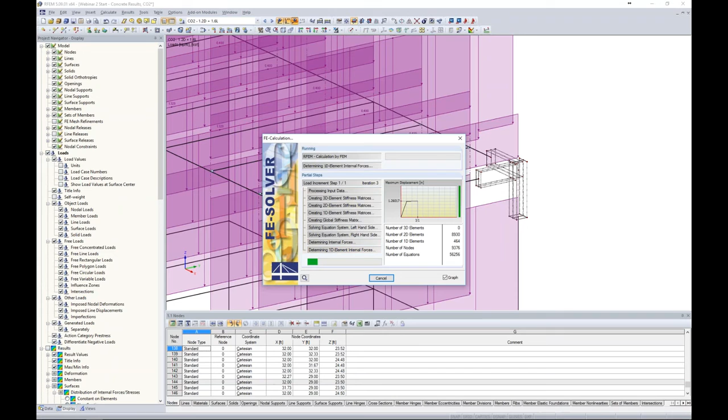Now we can run our first load combination. I'll apply the 1.2 dead plus 1.6 live, and run our analysis. Keep in mind this will take just a split second longer because we've now introduced these new finite elements for this connection into the program. As you can see, it still solves rather quick.

We can turn off our loads, and I'm going to choose a user-defined section here, visibility by selected objects. Now under my results, I'm probably most interested not in my members, but this time in my surfaces, and under surfaces we have our von Mises stresses.

So when I'm taking a look at this particular connection and my von Mises stresses, let me select my point here to rotate about that. I have some pretty high stresses here at these critical points, as you can see, 165 KSI.

Now you'll notice that the program is smoothing all of these internal forces together, just so we can have a nice, pretty picture of what's going on with our connection. But in reality, this isn't a correct way to view our results. It's so important with any finite element software that we pay careful attention to how we're viewing these results, such as stresses on our surface elements.

Now, with my AISC Advanced Steel Design webinar, I did an entire hour dedicated to a connection just like this, going into much more detail, but we're almost out of time today. So the only thing I want to show you is that rather than tying it together with this smoothing algorithm, we'd rather view our results here under our display tab in our project navigator.

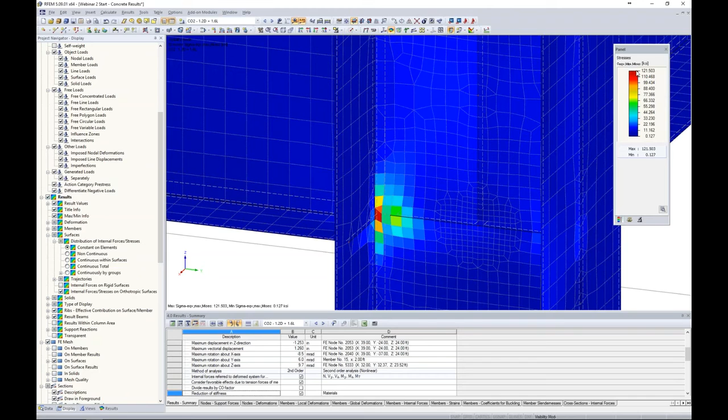Under surfaces, for the distribution of internal forces and stresses, we'll view this as constant on elements. Now each particular FE element has its own contour, and we're not trying to tie those together. Our stresses went down from 160 to 121. They're still high, but you can see what a difference that makes.

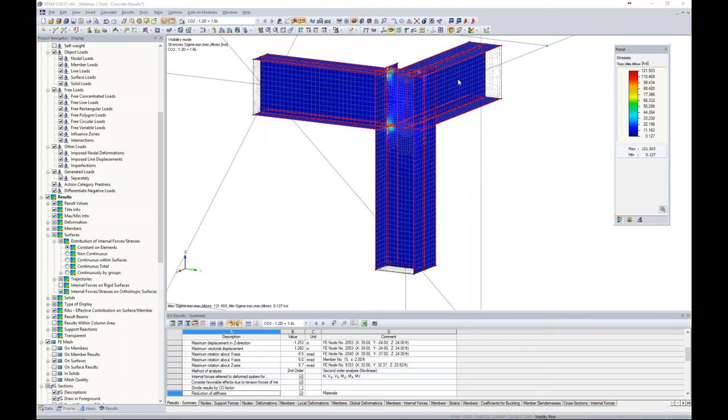So we still have extremely high stresses, and I think we're all in agreement that this is much beyond the yield strength that this connection type can handle. So real quickly, we'd like to utilize the nonlinear capabilities within the program, such as a plastic design. I can select all of my surfaces here and right-click to edit them. Currently, I'm just using the Steel A992 defined within the program—that's what all my steel members are designed for right now. But I'm going to create a new material.

Again, I'm just going to go to my material database, which we covered in Webinar 1. I'm going to activate my favorites group to select Steel A992 here. I still want all those same properties, but for my material model I'm going to choose isotropic plastic 2D/3D.

This allows us to do a plastic analysis within the program. We can get into some very complicated details here, such as tearing and yielding, and we can change our strain hardening modulus. But for this example, our yield strength is more or less set to 50 KSI, and our strain hardening modulus is given as such.

I click OK through these dialog boxes, so now I've simply changed those surface elements to utilize the isotropic plastic 2D, but all the rest of my steel elements are still utilizing an isotropic linear elastic material model.

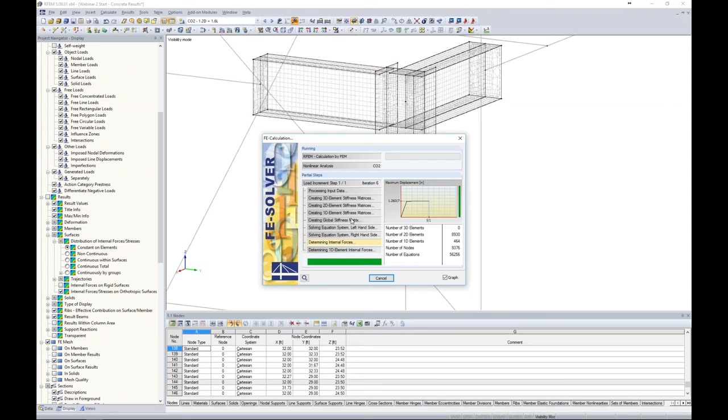So now when I run this exact same load combination, the program will apply these loads to each element within this finite element connection, and the minute it reaches the yield strength of 50 KSI, that load is distributed to the adjacent FE mesh elements. It will continue to do so until the load has been fully distributed. So in reality, we shouldn't see a single FE mesh element here higher than 50 KSI.

And taking a look at our stresses, that's exactly what's occurring. The highest stress here is 50 KSI before that load is distributed to an adjacent element.

We can also now view, under our results tab, an option for criteria, since we're running a plastic analysis. Criteria shows us the nonlinearity rate of a single element, so you can see exactly which elements are in the fully plastic state or have completely yielded.

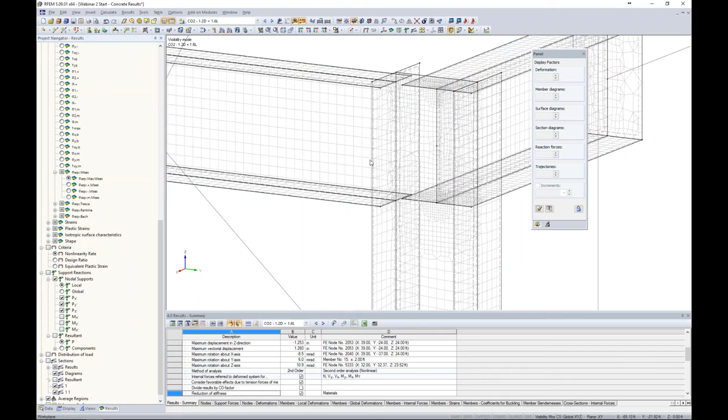So just a little interesting topic, and like I said, my Advanced Steel Design goes into much more detail on this if you are interested in a connection like this.

One more quick topic to cover before ending this webinar is just a couple of printout report options. The first, which maybe some people didn't know existed in RFEM, is a 3D PDF.

For example, let's say I'm interested in quickly printing this connection detail to a 3D PDF. I can either go to File, Print Graphic, or use the quick tool under our toolbar called Print Graphic. We can print directly to a printer, print to our printout report, or print to a 3D PDF. When I click OK, it just asks me to save it.

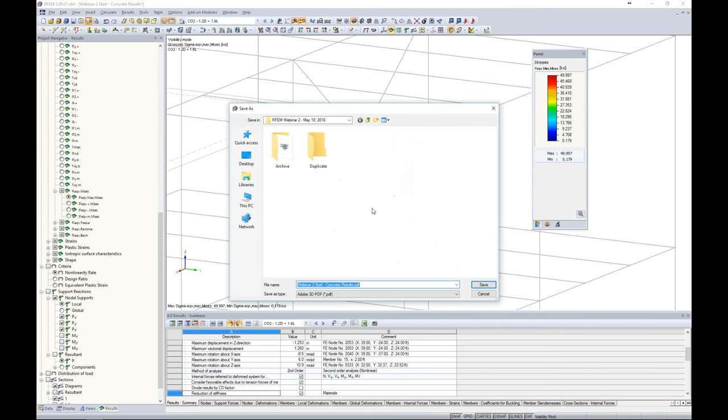I can save it wherever I'd like, and it will automatically launch this 3D PDF based on my structure. When we take a look at this 3D PDF, here's our entire structure, and what's great is that we can now make changes to our view within the actual Adobe PDF program.

We can spin it, for example, to take a look at our connection. We can use the pan tool to zoom in and really focus on this connection in particular. So you can see how this can be beneficial for any type of graphic views in a 3D printout. Then we can email it, add it to a printout report, or do whatever we'd like with it.

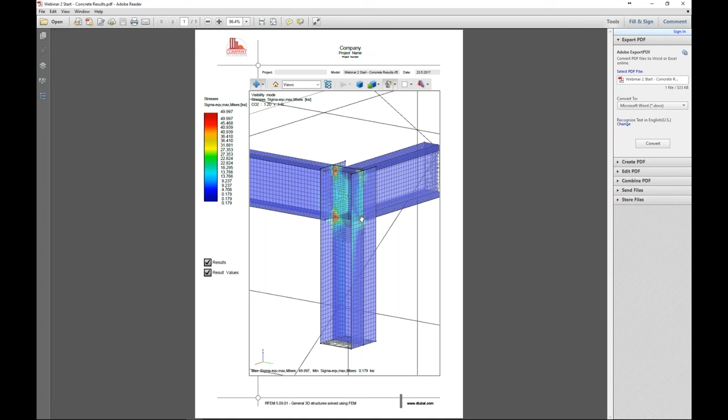Now the other quick topic to discuss is if we're interested in our results and quickly printing off many load combinations at once. For this, I'm going to jump to an already saved model, back to our concrete example of our slab.

Typically I'd have to take a picture of load combination 7, add it to my printout report, change my load combination, take a picture of load combination 8, add it to the printout report. So what features do we have that make our lives a little bit easier?

Well, under the Print Graphic report again, we have this option called mass print. So I'm going to print to our printout report, using the full page width, but maybe I'll use 50% of the height to get a couple of pictures on each page.

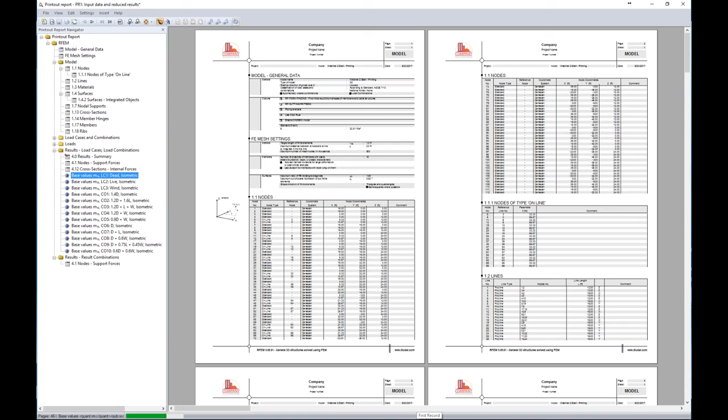Now the program asks me to generate my printout report. I can select one of the saved templates I have. I click OK, and now the program is cycling through all of the different load combinations for my particular MX internal forces of my slab, and it's going to automatically add them to my printout report. Now you can see we jump directly to where those pictures are added.

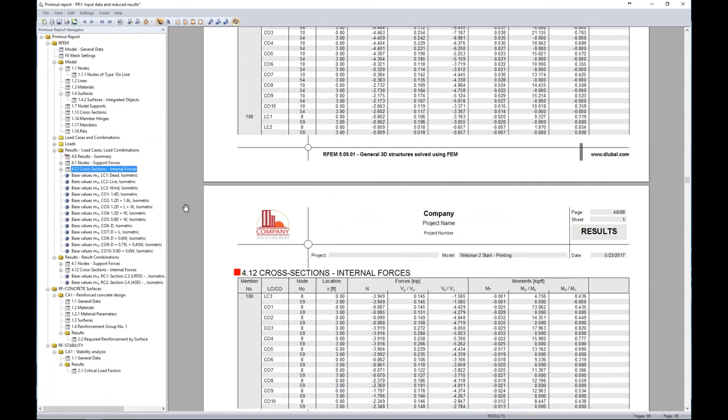I can zoom in here to show you guys exactly what's going on. So here's my load case 1, dead load, and my applicable MX forces. Load case 2, and we can get into our load combinations 1, load combination 2, and so forth. You can see how this can be extremely valuable if we're trying to quickly print off a lot of different load cases at once or results. We can automatically do that.

Keep in mind, you can always right click to edit one of these pictures. If, for example, I don't want to see the FE mesh settings, I can go under my display, scroll down to my FE mesh, turn that off, click back, and now you'll see that the picture I currently edited is automatically updated to not show the FE mesh.

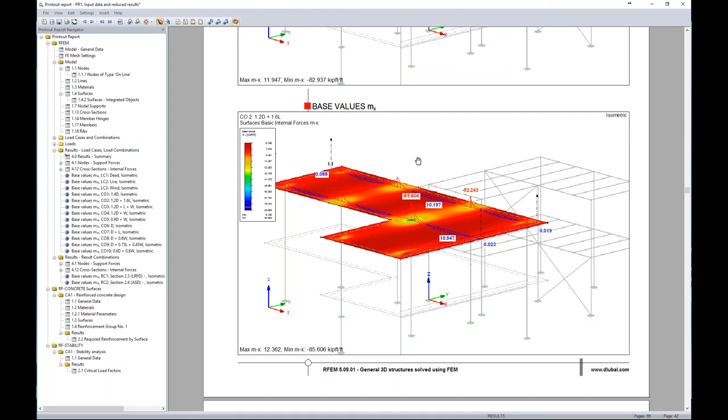Another very powerful feature: if I make any changes to this model, including different loads or different cross sections, all of these pictures will update automatically. So I never have to worry about reprinting all of these pictures. I think our printout report is one of the stronger features of our program, especially in comparison to what you're currently using. You can always add your company logo and company header. You'll see all of the add-on modules are added to the printout report as well.

If we wanted to switch the order of these - for example, remember running RF-Stability at the beginning of the webinar - if we wanted to have RF-Stability in our printout report before our design of our RF-Concrete surfaces, all I have to do is select it and drag and drop it, and the program will automatically update the printout report to put RF-Stability before RF-Concrete surfaces. So again, just a very powerful feature in terms of our printout report.

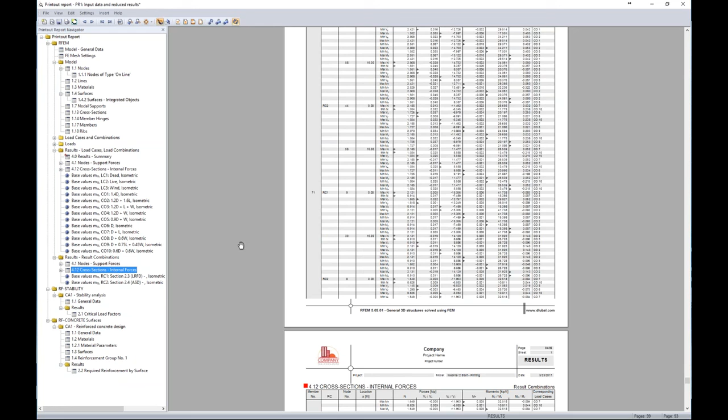So with that said, we can jump back to the PowerPoint to conclude our webinar today.